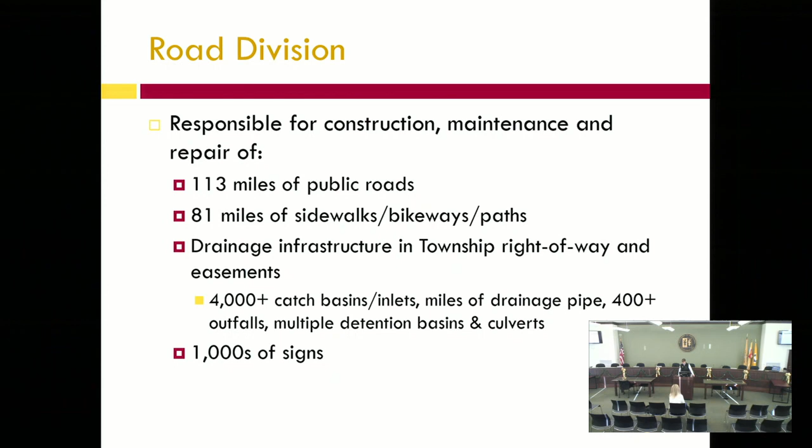One of the main tasks that takes up a lot of effort and time during the year is simply road maintenance, and that's maintenance of the pavement, repairs and maintenance of the actual asphalt pavement surface.

So 3 of our main asphalt pavement tasks that we perform, the first is patching or milling and filling. That's when DPW goes out or a contractor will go out and do what I call checkerboard patching on the roads, which is where we look at hazards or anything that may become a hazard. We'll mill the pavement out, so remove the top 2 inches of the old asphalt, and we'll place new asphalt in its place.

These repairs are conducted annually by our road department personnel in the warm weather months. We also have the ability, since we do a lot of these repairs in-house, to make emergency repairs anytime we need throughout the year. And something we do to supplement what our own crews do is we also utilize contractors to take care of some of our larger or more extensive repairs.

Another task we take care of is crack sealing. This is an annual preventative maintenance program. It targets roads that are typically 5 to 7 years old. We go out and fill the cracks with basically a rubberized tar type of solution. The purpose of that is to prevent water from penetrating into the pavement, getting underneath and degrading the base or sub-base. It could prevent some potholes from forming as the water gets in with freeze-thaw.

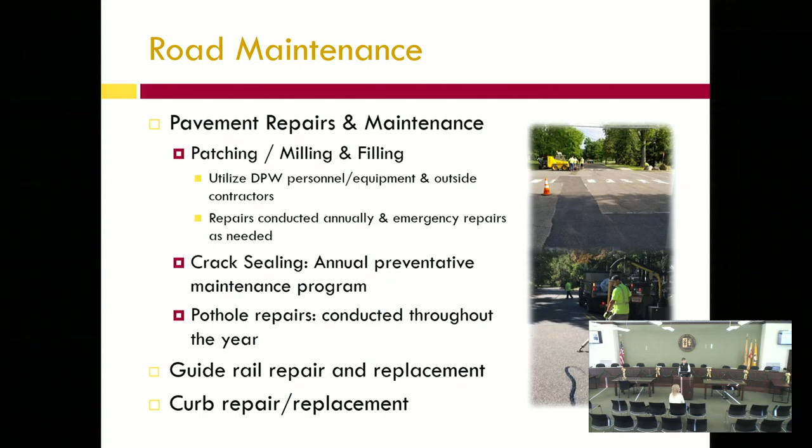Another part of the road maintenance is guide rail repair and replacement, of which we've done a lot over the last few years. So all the guardrails on township-owned roads are the responsibility of the road department. And then lastly, all curbs are township responsibility. So we do quite a bit of curb repair and replacement of Belgian block curb, concrete curb all throughout town, on the township and county roads.

Another function of the road maintenance is street sweeping. Street sweeping is performed on a continuous basis during the spring, summer, and fall months, which equates to each street being swept about 3 to 4 times every year, if not more. The reason why we can't do street sweeping in the winter is because water is used for dust control, so we can't when the temperatures are below freezing.

Another thing to note about street sweeping is that it is required by the New Jersey Department of Environmental Protection as part of the permit that the township has for operating our storm sewer system. So the state requires that every road is swept 3 times every year. So we do maintain compliance on that with our 2 street sweepers.

Roadside mowing is another function of the road department's road maintenance responsibilities. As you can see, it's numerous miles that we do of roadside mowing. It's conducted to control vegetation for sight distance and safety purposes. Roadside mowing is done with a large tractor. It does sort of a rough cut, not a finished mower, but it's done for a functional and safety purpose. It's done to keep the vegetation off the roadway, to keep it cut down, to maintain sight lines, and it's really for the safety of the motorist as opposed to an aesthetic reason.

Additionally, there are numerous other areas that are mowed regularly during the growing season: township properties, traffic islands, and along some of the bikeways or paths. This type of mowing is done with traditional lawn mowing equipment, and it may be done on a more regular basis.

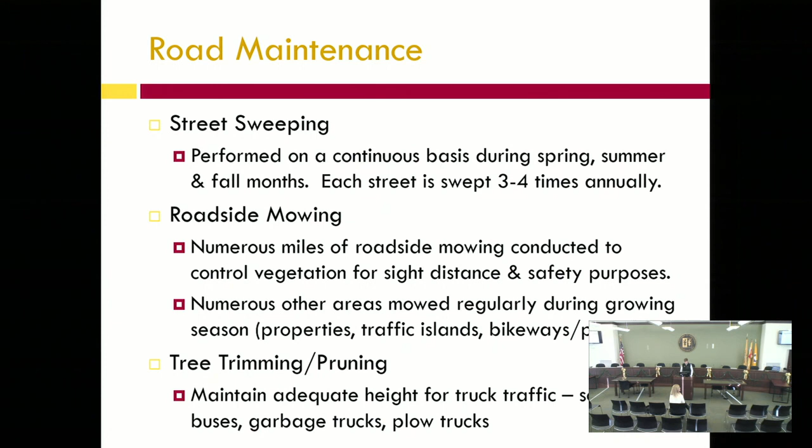Something worthwhile noting is about road repairs. What's the difference between a road repair and a road resurfacing or reconstruction? The primary difference is who's responsible for it. DPW is responsible for the repairs or maintenance, those patching or checkerboard type of repairs I mentioned earlier. A full resurfacing, which is a full road paving or reconstruction, is run through the engineering department as a capital improvement rather than a maintenance type of project.

That being said, DPW and engineering do work together. Every spring, we typically sit down and establish road repair priorities, go over the capital improvements for the year. So the way DPW establishes our road repair priorities is through that coordination and input from engineering. We also track calls from residents, and we also have our own observations to help generate a running list of road repair priorities that we'll undertake every year.

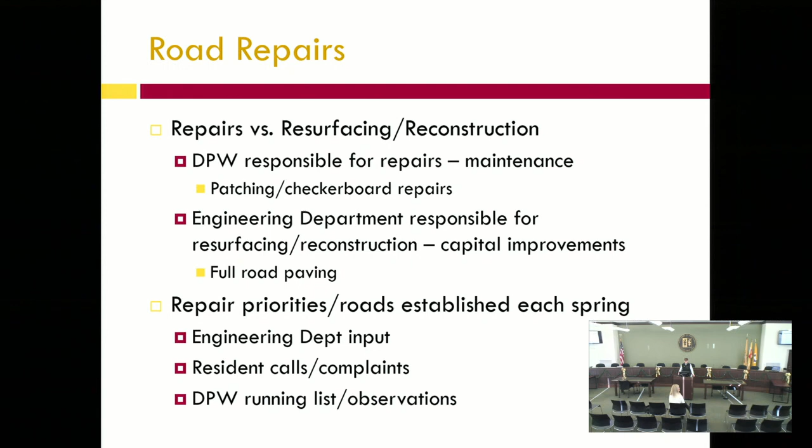We'll touch on drainage system maintenance. As I mentioned, we have over 4,000 catch basins or inlets, and DPW is responsible for all the repairs on those, rebuilding and constructing them if needed, also replacement of the grates and the curb heads to maintain compliance through the NJDEP, through our stormwater permit.

We have an annual inspection and cleaning program that we have to maintain, again a requirement of our stormwater permit. We have to inspect every one of those 4,000 inlets from the top every year. We have to inspect what's beneath the surface, 20% of those 4,000 every year. So every 5 years, every single one of those inlets has to get checked below the surface, cleaned if necessary. Any repairs need to be noted and followed up on and made.

We're responsible for repairing and replacing pipes as needed. Again, all the things on this slide are required as part of our New Jersey DEP permit. So as we determine that there are pipe failures or pipes are deteriorating, it's something that DPW is responsible for repairing or replacing. We're also responsible for repairing the outfalls.

Those are inspected on a rotating basis, I believe the same 20% every year. The engineering department has an inspector that goes out to every single one of those outfalls, oftentimes well off the roadway in the woods, and they generate work orders. What we see a lot is the head walls, which hold up the end of the pipe, deteriorate, or we see scour issues, when water rushes out of the pipe so fast it creates turbulence and erodes an area beneath the pipe, which could undermine the head wall or pipe. So we have to make repairs to help prevent that.

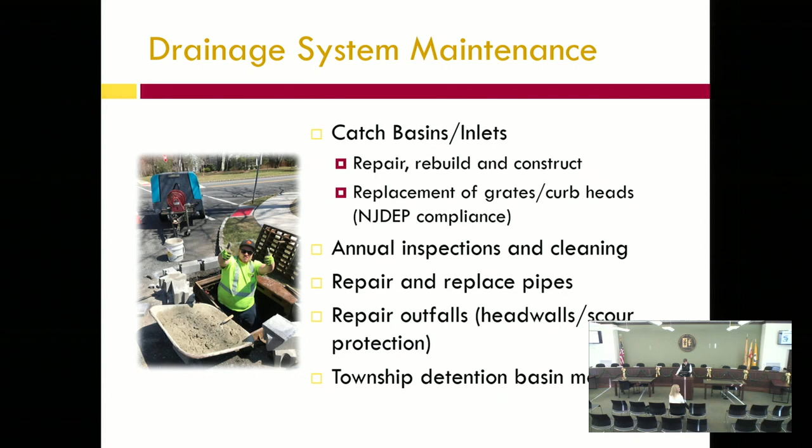Next, we'll discuss sidewalk or path maintenance. Just like all the roads, DPW is responsible for all repairs and patching on all of our sidewalks and paths throughout town, those 81 miles that are in the public right-of-way. Something to note is this includes all sidewalks in the public right-of-way, regardless of whether it's on a township or county road. They're all township maintenance responsibility.

So we perform repairs and patching to the sidewalks, much like we do to the streets, especially on the asphalt sidewalks. We also repair and patch the concrete sidewalks. We do resurface sidewalks from time to time as needed to maintain a smooth, safe walking surface. Uneven joints are something we see on concrete sidewalks where tree roots, freeze-thaw, or something else causes the two slabs to come together and become uneven.

So we have the equipment to grind those if they're within a certain tolerance and smooth them over, or we may have to excavate and reset that slab or re-pour an entire slab.

Much like the mowing on the roads, we're responsible for mowing and trimming over the sidewalks too, from a safety and functional aspect, to make sure a pedestrian doesn't hit a branch walking down the sidewalk, just like a truck wouldn't hit one on the street. So instead of that 12 to 14 foot box on the road, it's a little shorter on sidewalks, 7 to 8 feet. We're also responsible for snow removal on certain priority sidewalk routes within the township.

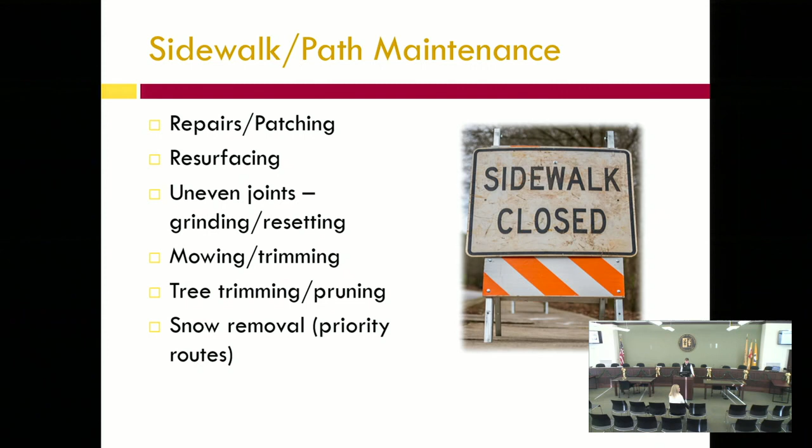There are other duties of the road division, one being maintenance of certain township properties. The road division does mowing and landscaping at facilities like town hall, the police department, the health department, the library, our DPW building, plus the sidewalks and parking lots at those facilities, our commuter lots, the downtown parking lots, and all the drainage systems associated with those properties, the same type of drainage maintenance we do on the roads.

The road division is also responsible for operating the Pill Hill Recycling Center. It's open every weekend throughout the year for residents to dispose of materials. The road department staffs it on weekends, but we also do a lot of work during the week, since all the disposal of materials brought in happens then. We haul a lot of our own containers to different transfer stations or processing plants depending on the material, and we operate a large grinder to process all the vegetative waste that comes into Pill Hill.

We're able to reuse a lot of that vegetative waste on township properties, on some of the walking trails, and even provide it for residents to use at home.

And lastly, we have the traffic control devices. As I mentioned, there are thousands of signs. The township has an in-house sign shop, so we have folks who can fabricate, install, and repair signs in-house, which equates to a cost savings. If we need a sign put up quickly in an emergency, or a specific non-standard sign installed, we have the ability to create those in-house.

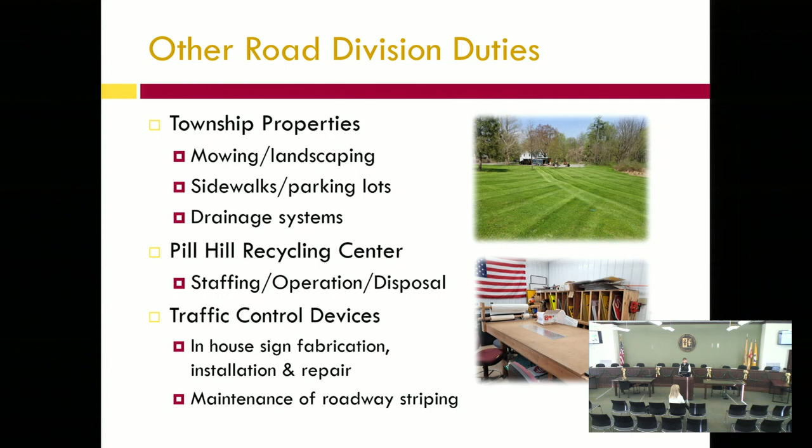Next, we'll move on and take a look at the fleet division. The four mechanics in the fleet division are responsible for maintenance of all vehicles and equipment in the township inventory, which equates to over 150 vehicles, including passenger cars, police cars, light and heavy duty trucks, light and heavy construction equipment like front end loaders, backhoes, skid steers, and even some of the fire trucks here in town.

It also includes over 250 pieces of small equipment, all the mowers, trailers, handheld power equipment, weed whackers, chainsaws, leaf blowers, and that type of equipment. The fleet division also provides aid to the Sewerage Authority and to the fire departments and first aid squad as needed.

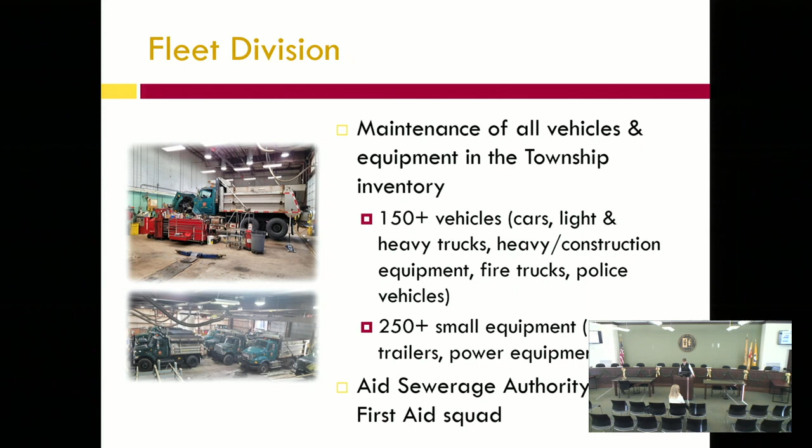A lot of what the fleet division does is regular service: oil changes, tires, brakes, inspections of the vehicles when they're in the garage, coordinating state inspections, some fabrication and welding, and also repairs due to accidents, incidents, breakdowns, and small equipment repair.

A lot of the regular service is done in-house by our own mechanics. We also have the ability to spend quite a bit of time diagnosing and troubleshooting larger repairs, though we do utilize outside shops sometimes due to the complexity or time constraints.

We have a welding bay in the shop, so the mechanics can do fabrication or welding on the fly, not only for vehicles and equipment, but for any other fabrication needed as part of DPW's job, like maintaining the storm sewers or the roads. They also coordinate state inspections, the regular inspections on all the light and medium duty vehicles.

Also the heavy duty vehicles, the large trucks have to have what's called a smoke test done annually, so they coordinate that as well. And then, as I mentioned, 250 pieces of small equipment. So anything goes wrong, sometimes a weed whacker doesn't start, a carburetor's clogged, all those types of things the mechanics are responsible for.

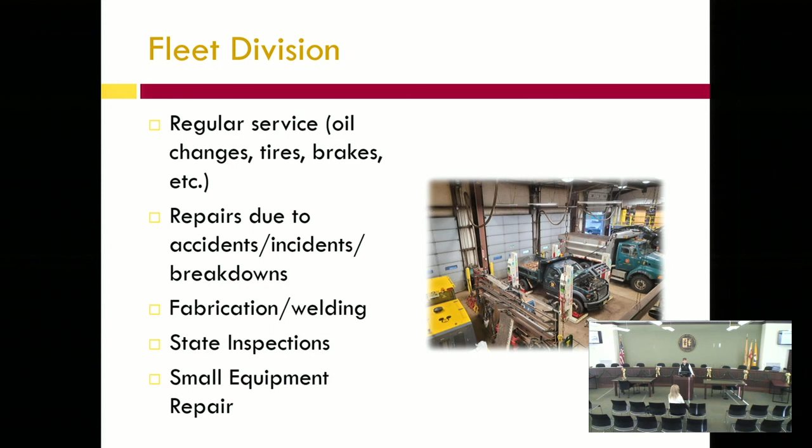So it really takes someone who can work on a wide variety of different equipment, pivot at the drop of a dime when something comes in, from working on say a snow truck, maybe a lawnmower, back and forth. So the mechanic shop's quite busy, and it's really a vital part of what keeps the township moving behind the scenes.

So next we'll discuss the grounds division. The 9 employees of the grounds division are responsible for all the maintenance at the 10 township parks, which equates to over 2,000 acres of parkland, 200 acres of which are sports fields. That's over 32 sports fields.

Also responsible for maintenance on all the sports courts, the pickleball courts, the tennis courts, paddle tennis, basketball, the hockey rink, the playgrounds at Pleasant Valley Park, Dunham Park, Rebel Hill Park, and Southard Park, all the trails and paths at all the township parks and other open space properties.

Provide some assistance in operation and maintenance to the pool and the golf course. So the grounds department is not necessarily responsible for the day-to-day of the pool and golf course, but we do certain things like mow the grass at the pool, do some of the landscaping, assist with opening and closing the pool and the pool cover. We also do some work for the golf course too, tree removal, light construction, that type of thing.

And including with all the parks, the grounds division is primarily responsible for all the park buildings, all the other amenities in the parks, whether that be benches, picnic shelters, bathrooms, some of the indoor pavilions, that all falls under the grounds division.

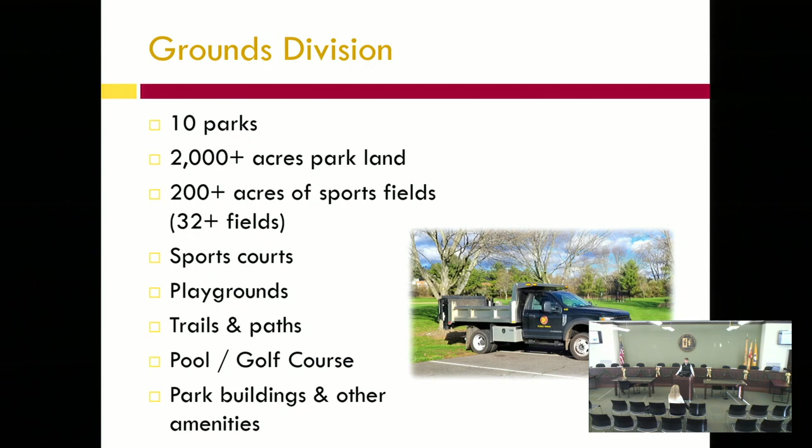As you can imagine, one of the primary duties of the grounds division is mowing, to mow all the fields, all the trails, all the other areas in the parks. Typically, the mowing in the parks is done on a once-a-week basis, although at certain times during the growing season, the athletic fields may need to be mowed more often than that to maintain the appropriate height for whichever sport is playing. You're also responsible for field maintenance.

And what we mean by that is all the painting and the lining of all the multipurpose fields, the dragging of all the skinned baseball and softball infield surfaces, moving, setting up, maintaining the nets on all the goals, all the backstop netting, and all that's the responsibility of the grounds division.

And when we look at field maintenance, we look at a setup as basically any time a field is set up for a practice or a game. That could be any of the things I mentioned, the painting, the dragging, the goals. The grounds division performs thousands of those field setups every year.

Something else they're responsible for is the artificial turf at Mountain Park, which you may think, artificial turf, does it really require maintenance? And yes, it does. The artificial turf, believe it or not, requires at least monthly maintenance, grooming the turf, leveling out the crumb rubber, infilling it in some areas where it might get worn away. The groomer picks up metal or other objects that may have fallen on the turf.

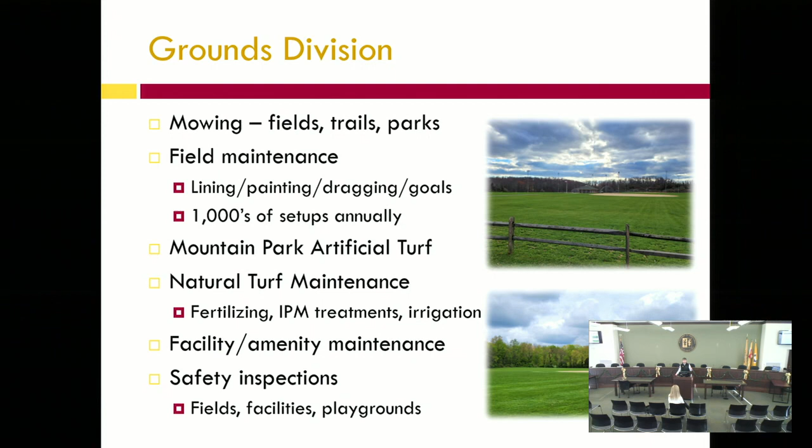All right, we'll move on to the buildings division now. Quite simply, the buildings division is responsible for maintenance and repair of all the township buildings, including all the systems in the township buildings—so that would be all the electrical, plumbing, HVAC.

In addition, the buildings division is responsible for carpentry work or repair work, painting, janitorial work. They empty the recycling every day. They help oversee our janitorial contractor, setups of rooms for different events, and coordination of other repairs or projects that happen within the township buildings.

And this is a list of most of the township buildings: town hall, the police department, health department, the engineering and DPW building. We provide assistance to the library with maintenance and repairs, the community center and teen center, the two OEM annexes—the former Liberty Corner First Aid Squad and the former community service building on Stonehouse Road—the Brick Academy, and the Lyons train station.

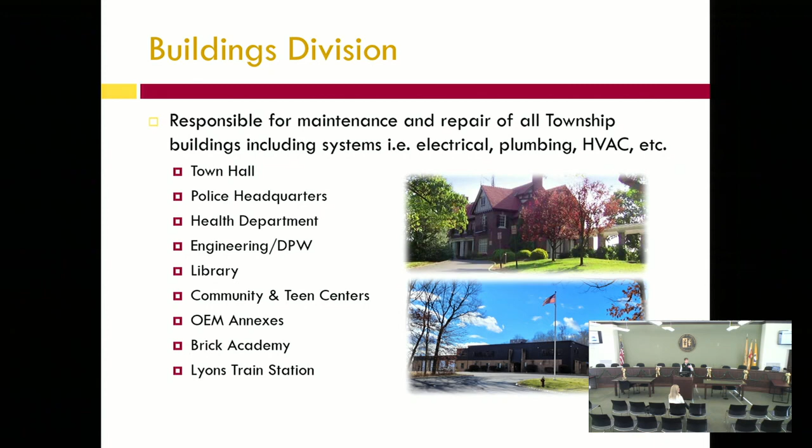So in addition to the maintenance and operation, the buildings division also has responsibility for streetlight maintenance all throughout town. These would be the streetlights, not the ones overhead on the wooden utility poles—those are owned by the electric utility, JCP&L.

But rather in the Hills and Spring Ridge developments, there are streetlights that are standalone. They're not on utility poles, they're on the ground. Those are all owned by the township.

In addition to those in those developments, we also have all the streetlights at the different township properties—the parking lots downtown, the complex here at Town Hall and the police station, Pleasant Valley Park. So the buildings division has to take care of all those streetlights.

And it's not always as simple as changing a bulb when one burns out. A lot of times there's quite a bit of investigative or troubleshooting work that has to be done. A lot of underground wires get broken, so the buildings division sometimes has to spend a considerable amount of time looking for and repairing problems with the streetlights.

And then we also get, on occasion, a vehicle accident where something gets knocked down, and they have to be put back up.

And then, just like the grounds division is responsible for a lot of inspections, so is the buildings division. They're responsible for inspection and record keeping on a lot of different components of the township buildings, one of which would be the emergency generators we have at many of our facilities, some of which are permitted by New Jersey DEP because of their size, so there's a lot of additional record keeping that goes with that.

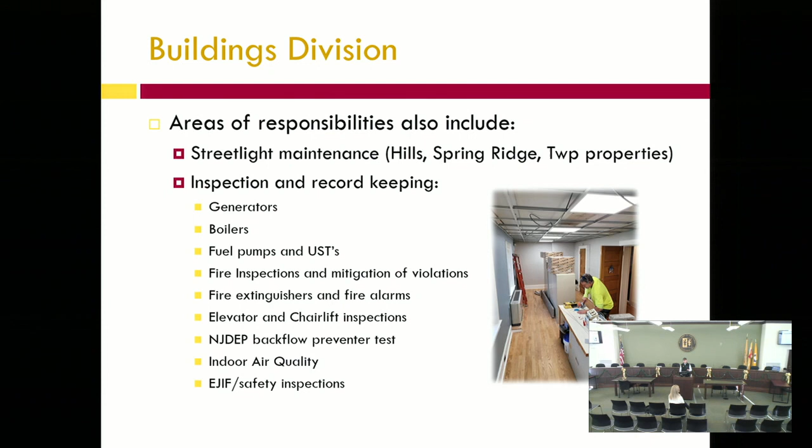So that takes care of the 4 operational divisions, and the last division of DPW is our administrative services. Those are our folks in the office who are primarily responsible for the first interaction with the public. As part of that, we receive concerns or complaints from residents and other members of the public, about 1,500 or more every year. Almost all those complaints are logged into our work order system and assigned to the appropriate supervisor from one of the operational divisions to inspect, investigate, and follow up on.

The administrative division is also responsible for distribution of the Pill Hill permit cards, so residents can have access to Pill Hill. Another function is the safety coordinator and right to know.

The safety coordinator is one of our administrative folks. She is responsible for making sure that our employees in DPW and throughout the township stay up to date on any required safety trainings, making sure that all of our written safety programs and policies are up to date and correct and in place, and also responsible for dealing with any accidents or insurance type incidents. If we have a motor vehicle accident or a property damage accident, the safety coordinator is the go-between between the township and insurance for those types of things. She's also the right to know coordinator, which is basically inventorying and reporting all the chemicals at all of our facilities to the state.

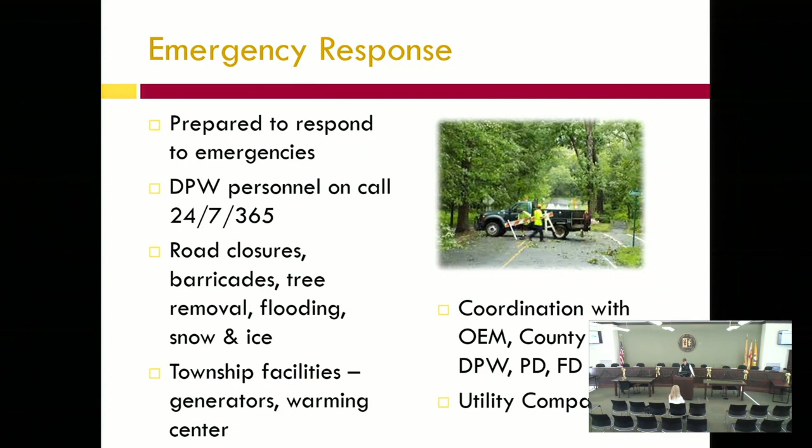Trees are another big thing we get a lot of questions about. DPW is responsible for tree inspections and removal, not only on township properties but also within the right-of-way.

We encourage residents, if you have an issue with a tree on township property or in the right-of-way, to contact us to report the issue. We'll generate a work order, have staff inspect the tree, and we may remove hazardous trees from the right-of-way.

Basically, if a tree is on township property, we own it and will remove it if needed. But in the right-of-way, the township doesn't own the trees — they belong to the underlying property owner. However, the township has the ability to remove hazardous trees in the right-of-way if they pose a safety impact to the motoring public or pedestrians on the sidewalk. We inspect every tree on a case-by-case basis to determine whether it meets the criteria for action.

We may trim or prune trees in the right-of-way if needed — for example, if there's a dead branch over the road, instead of removing the whole tree we can trim or prune it. But another thing to note is that the township cannot and does not remove trees from private property.

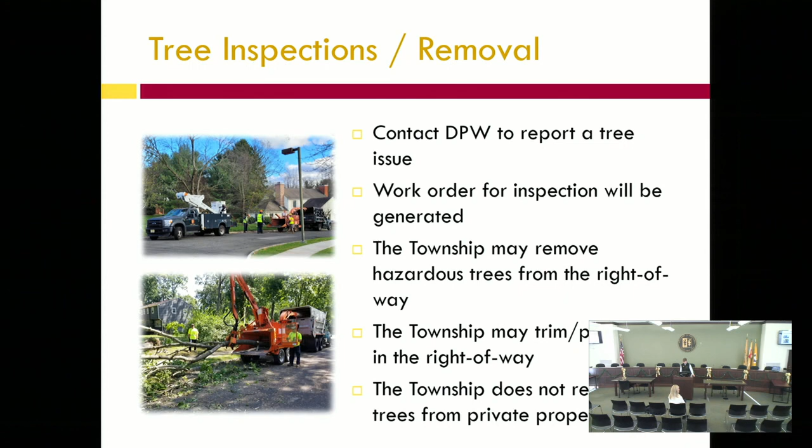Our other big responsibility is snow and ice removal. I often say it's one of the most visible things DPW does. We're responsible for snow and ice removal on all 113 miles of township roads, and 30 of the 81 miles of sidewalk designated as school priority sidewalks. We're also responsible for snow removal of the school parking lots in town, the parking lots at municipal facilities, the parks, and various paths and trails.

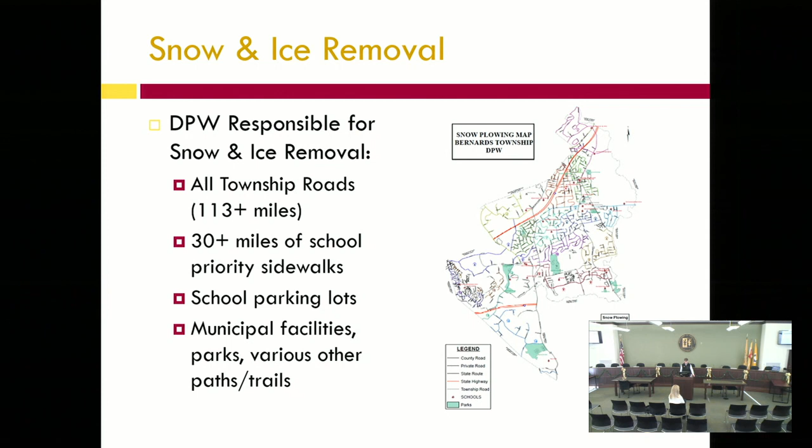As part of snow and ice removal, there are basically two types of operations that are carried out.

There's a salting operation and a plowing operation, and they could be carried out separately or together, depending on the storm. A salting operation we would typically run for about 1 to 2 inches of snow or less. To do a salting operation, we will utilize township crews only.

We'll provide treatment of all township roads, all facilities, the sidewalks at all the facilities, certain sidewalks throughout the town on the school priority routes, but not all of them necessarily, and the school parking lots. Typically, for the salting operation, it takes 3 to 4 hours to complete one round, and depending on the storm, it may require 1 or more rounds of salting.

During a plowing operation, it's typically done when there's 2 inches or more of snow forecasted. If we are doing a plowing operation, we will always do a salting operation at the beginning and end. So every storm, say we're predicted to get a foot of snow, we'll go out at the beginning when it first starts to snow and salt the road. What that does is help create a brine on the road surface, which helps prevent the snow from bonding to the pavement, making it easier to remove to get down to bare asphalt at the end of the storm. So if we have 2 or more inches of snow on the road, we'll move to a plowing operation.

In a plowing operation, we utilize all our township crews and outside contractors. We're responsible for plowing all township roads, the 30 miles of priority sidewalks, the school parking lots, and the parking lots and sidewalks at all of our facilities. Typically, for a plowing operation, it takes 4 to 6 hours after the snow has stopped falling to complete the plowing operation. So that would mean basically if you have snow falling for 12 hours, not only will we be plowing for those 12 hours, but we'll also take 4 to 6 hours afterwards to get fully cleaned up.

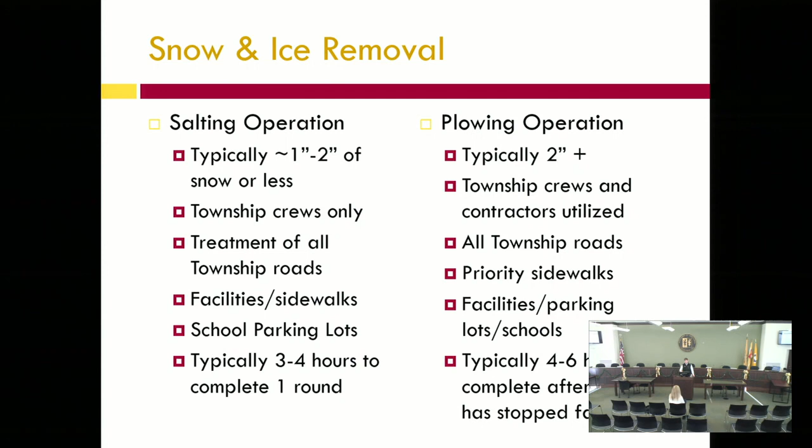We also have to keep an eye on the weather forecast. We might approach things differently if we know that after the storm it's going to warm up well above freezing or if it's going to plummet way below freezing. Some other variables to consider are the wind helps dry the roads out, the sun helps melt the snow, and the time of day, whether we're going into the evening or we have to think about rush hour, people getting to work or getting to school. Those are all different things we have to consider when dealing with winter weather. So even though it's easy to break it down into salting and plowing, it's usually a lot more complex than that.

As I mentioned, every storm is different, depending on the different types of precipitation we have and the other variables. What DPW does in the winter months is we monitor the weather constantly. We subscribe to a weather forecasting service and receive updates on a daily basis. When they're predicting a snow event, those updates will come more frequently to help us make a better informed decision on what to do about the weather.

Our crews are always ready, just like any other emergency, to respond whenever needed. But what we typically do is use those weather forecasts, looking at all the different variables, to try to schedule a start time for every storm. What that does is ensure that our crews are here, they can get here safely, but they're also here in town. As soon as it starts to snow, as soon as anything happens, they're ready to respond. Because as we know, the weather forecasters, while they may be good, they're not always 100%.

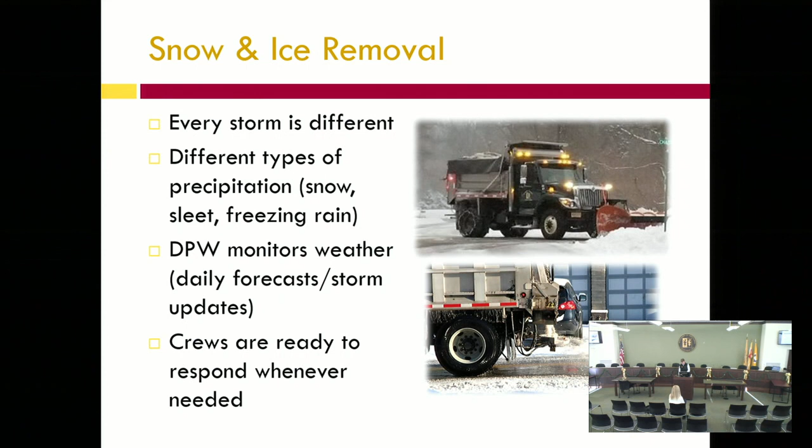So a couple different issues that come up during snow removal. The first of which is mailboxes.

Unfortunately, mailbox damage is one of those unavoidable consequences of snow removal. It happens everywhere, not just in Bernards Township. If your mailbox is damaged during a snowstorm, we ask that you report the damage to DPW as soon as possible, and just like trees, we'll go out and inspect every mailbox.

Unfortunately, the township does not reimburse residents for replacement of mailboxes. We will try to make temporary repairs or provide a new post or mailbox if possible, but we're not responsible for the ultimate repair. What we try to do is make sure residents don't stop receiving their mail, so we may make a temporary repair or provide a temporary mailbox so you can continue to receive your mail until you can get your mailbox fixed.

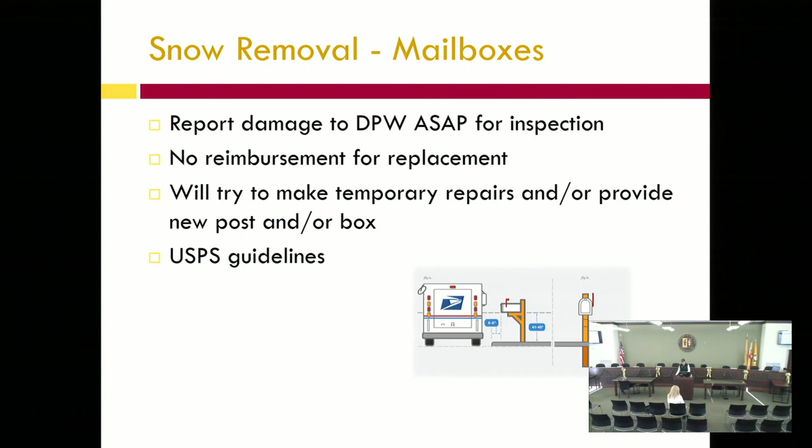I would encourage anybody who's experienced issues with mailbox damage, or is going to install a new mailbox, to go online and find the U.S. Postal Service guidelines on mailbox installation and follow those when putting your mailbox in.

Another issue we experience is getting plowed in. Again, just like mailboxes, it's unavoidable. It's not possible to prevent driveways from being plowed in during a snowstorm. What we do in Bernards Township is every time we do a plow run, we plow curb to curb. We don't just do the centers to get the road open. We push all the way back to the curb every time we plow.

That's done to keep the road as wide as possible, provide for parking after the storm, help open up the drainage, and allow emergency vehicle access. It's also done to keep the snow off the road in case we get back-to-back or big storms. We've got to keep pushing that snow out to make room for what might be coming.

So we have to plow a certain way too. We have to plow in the direction of traffic, and you have to push the snow to the curb, which is always going to be to the right while the plow is going in the direction of traffic.

So what'll happen is if you shovel out the end of your driveway before we've done that final plow pass and gotten it back to the curb, not only the snow coming off the plow, but once the plow finds that hole in the snowbank, everything in front of the plow is going to dump into the driveway too.

So there's a couple different things residents can do to help prevent that or mitigate it. The first would be not to shovel the last 3 to 4 feet of your driveway until the storm is over—so after the snow stopped, 4 to 6 hours later, after the road's been plowed curb to curb and salt's been put down, you could shovel the last 3 to 4 feet.

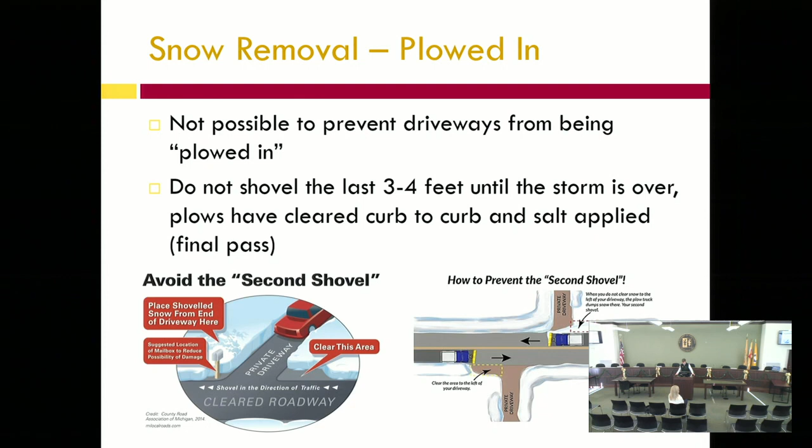A couple things that are going to help us help you during snow removal. First would be to follow the on-street parking prohibition. Every time there's snow on the road in Bernards Township, on-street parking is prohibited. It's important because cars parked on the street impede our ability to effectively, efficiently, and safely perform our snow removal function.

It also leaves a concern after the storm. If we have to plow around cars, there's snow banks, there's piles in the road. If we're going to have freezing temperatures, those could freeze and become an obstruction or hazard later on.

Another thing you can do is not deposit any snow in the roadway. So when shoveling your sidewalk or driveway, please do not deposit snow in the road. That's also prohibited here in Bernards Township.

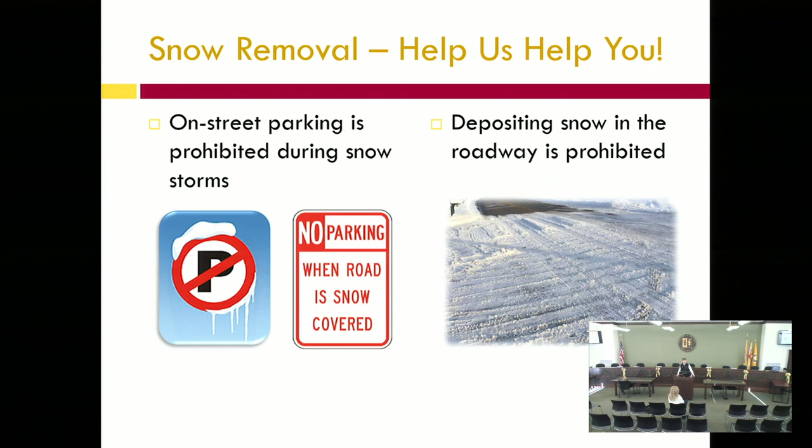And the negative impact on that is much like if snow is left in the road from a parked car. If folks shovel their snow into the road after the storm, it could freeze on the road and cause a hazard. So please point your snow blowers away from the road, and speak to your plow guys and ask them not to leave any snow in the road.

Next item would be fire hydrants. If you have a fire hydrant near your house, it's not something the township maintains. We simply don't have the resources to go out and shovel every fire hydrant in town—there are almost 1,000 of them. We do this on fire hydrants that are on township property. You can go out and clear a 3-foot diameter around the fire hydrant, which would just help you, your neighbors, and the fire departments if the hydrants are needed after a snowstorm.

Another thing to keep note of is storm drains. As I mentioned, we plow curb to curb to help with drainage. If you have a storm drain in front of your house that's covered in snow, feel free to go out and remove the snow, or call us and let us know, and we'll send a crew out in the days following the storm to make sure those are opened up so that when the snow melts, we won't have a drainage problem anywhere.

And the final thing is while it's snowing, stay off the roads. The less traffic on the roads, the easier it is to remove the snow. So help us get it done quicker, and please stay off the roads during a storm.

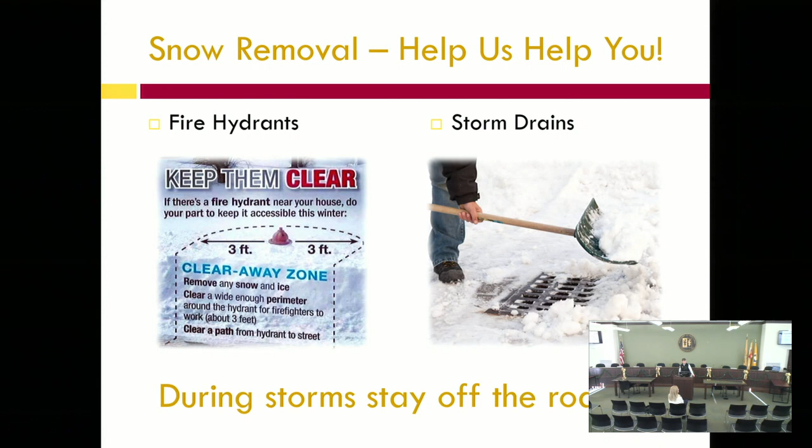That basically wraps up the snow removal topics. Next, we'll move on to trash, recycling, and disposal. Here in Bernards Township, the township does not provide curbside trash collection. The collection is the responsibility of each resident, who can contract with one of several different trash haulers to get their weekly garbage picked up. Recycling, on the other hand, is provided by the township through a shared services contract with Somerset County, and that's the bi-weekly recycling pickup provided by Somerset County. So if you have an issue with recycling, feel free to contact us, but you can also reach out to Somerset County directly.

What the township does provide, as I mentioned earlier, is the Pill Hill Recycling Center, which we'll discuss on the next slide.

The Pill Hill Recycling Center is open to residential property owners of Bernards Township. In order to use the facility, you must have a permit, which you can obtain at DPW, so feel free to stop in or call during our business hours. Pill Hill is open weekends year-round; during certain busier cleanup months it's open Saturdays and Sundays, but it is open every Saturday all throughout the year.

What Pill Hill does is provide the ability for residents to dispose of items that are not collected curbside by trash or recycling pickup. Some of the items we accept at Pill Hill are bulky waste like furniture or other large items that don't fit in a trash can, metal, appliances, electronics, cardboard and paper, tires (there is a fee to dispose of tires though), and vegetative waste like branches, leaves, and yard trimmings.

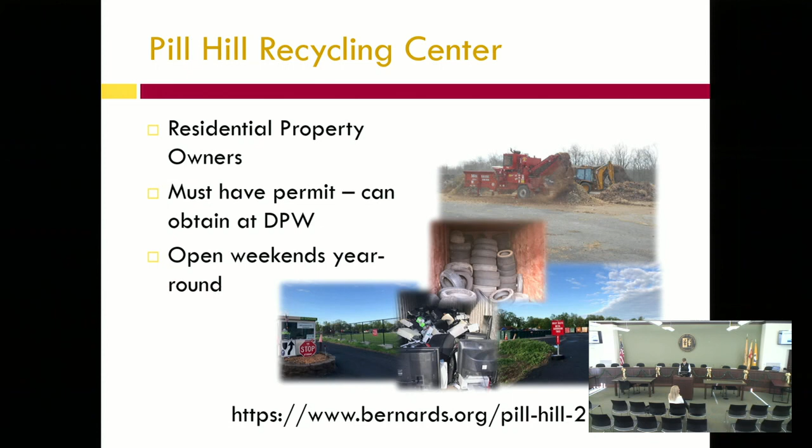Finally, a quick touch on utilities. The following utilities in Bernards Township are privately owned or separate entities from Public Works. If you have public water in Bernards Township, you're serviced by New Jersey American Water. The whole township is serviced by Jersey Central Power and Light for electric and PSE&G for gas. If you live in the Hills part of town, your public sewer is provided by the Environmental Disposal Corporation. But if you live outside the Hills and have public sewer, it's provided by the Bernards Township Sewage Authority.

We encourage residents, if you're having an issue with one of these utility providers, to contact them directly. However, if you see a utility issue that's affecting the roadway or a safety hazard, feel free to contact Public Works or call 911 after hours or if it's an emergency. A couple examples of that would be a water main break or a tree on the wires.

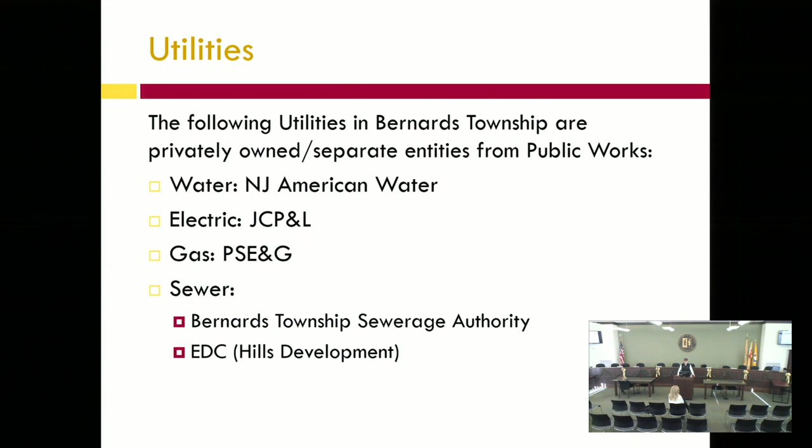Another way to get in touch with us, in addition to our contact information on the next slide, is on the Bernards Township website—you can use the report a concern function. That will take your concern and input it directly into our work order program where it gets assigned to the appropriate staff to follow up. We do ask that you provide at least your contact information, the location, and as much detail as possible on whatever the issue might be.